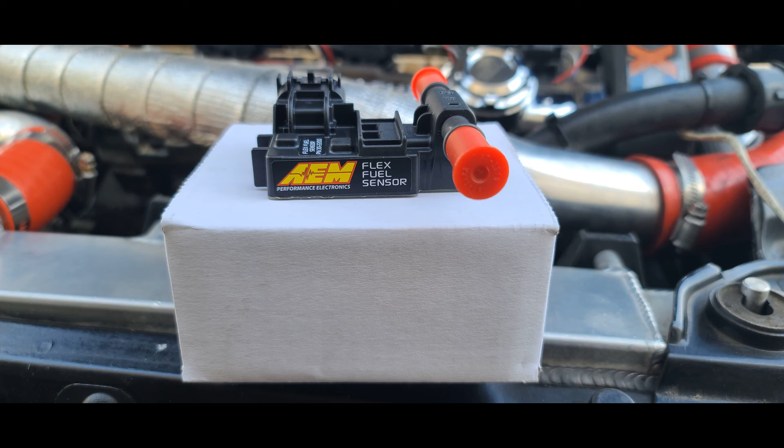Today we're going to be installing the AEM Flex Fuel Sensor on the Mitsubishi 3000GT VR4. Then we're going to go into the AEM Series 2 and make the necessary configurations in the ECU to run flex fuel in the car. We'll spend a little time talking about the pros and cons of E85, what other options are available to you, as well as considerations for if you need to do this, and if so, when. We've got a lot to do.

Let's get started. Installation is a fairly straightforward process. You're going to want to identify your return line for your fuel. That's going to be the one coming after your fuel pressure regulator, heading back toward the fuel tank and the pump.

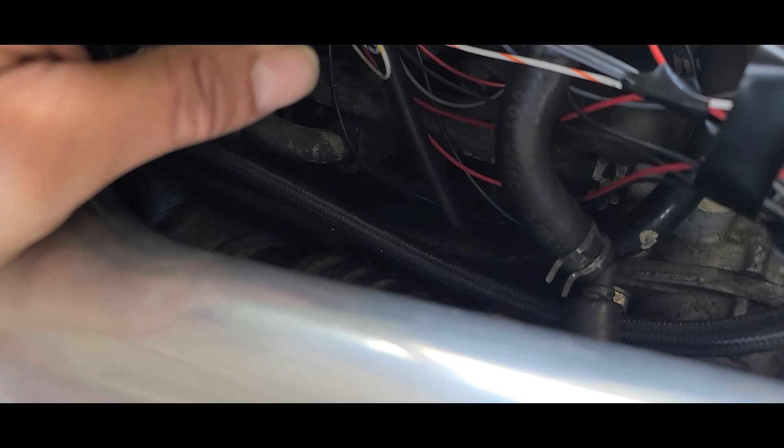Once you've identified that line, you're basically just going to cut it, relieving the fuel pressure first so nothing squirts on you. Then you're going to put the flex fuel sensor right in line with that line, so the flow comes into the sensor and out of the sensor back to your fuel pump. It doesn't matter which direction you put the sensor in, because it's going to pick it up either way.

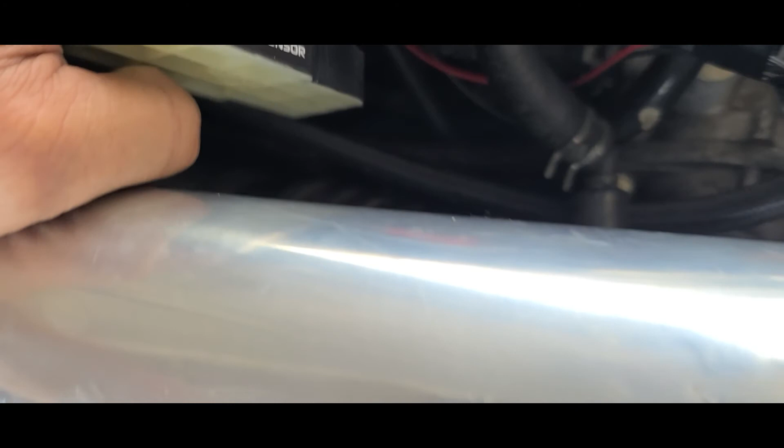Once that's done, all you really need to do from there is make three connections to the harness. One's going to be to ground, one is going to be to a 12-volt switched power, and the other one's going to go back to your ECU to provide the signal for AEM to pick up and determine what to do with your flex fuel amount.

Okay, so we start off by removing our return fuel line from our fuel pressure regulator. That'll give us access to the line and allow us to work with it.

Once you've loosened the clamp, you'll have to work it back and forth on each side, possibly with a screwdriver, so you can get it all the way off of there.

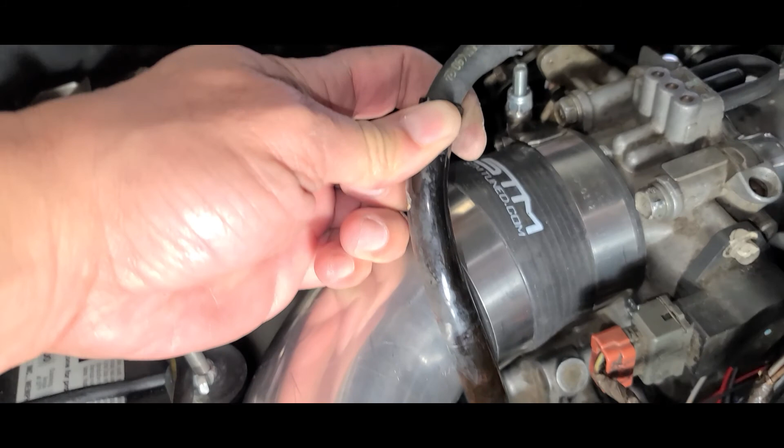After you've got your return fuel line removed, give yourself enough access. You can then cut a spot maybe about 6-7 inches down, which will allow you to insert the flex fuel sensor right there. Once your fuel line is cut, you begin the process of putting in your barb fittings, one into each end. Stick them all the way in there and secure them with a clamp.

Once you've got your barb fittings inserted into your return lines, tighten them up with a clamp to make sure they don't come off, and then we'll be ready to insert the flex fuel sensor.

Next, you insert the flex fuel sensor into your end fittings. Make sure that the fittings snap all the way until you hear a click. At this point, it's probably a good idea to go inside the car, start up the engine, and check for any leaks.

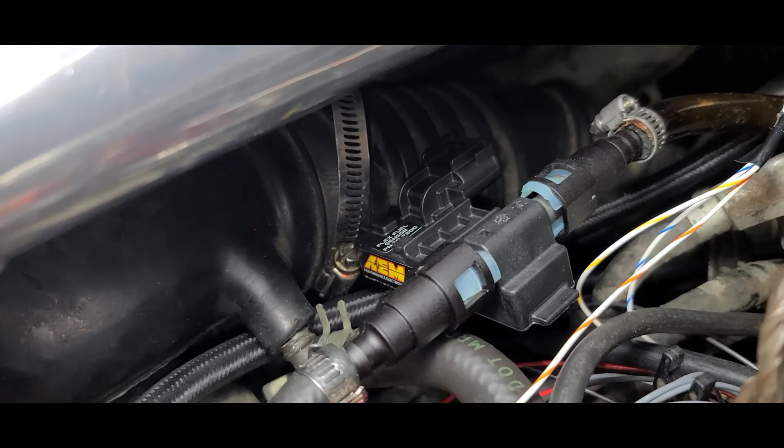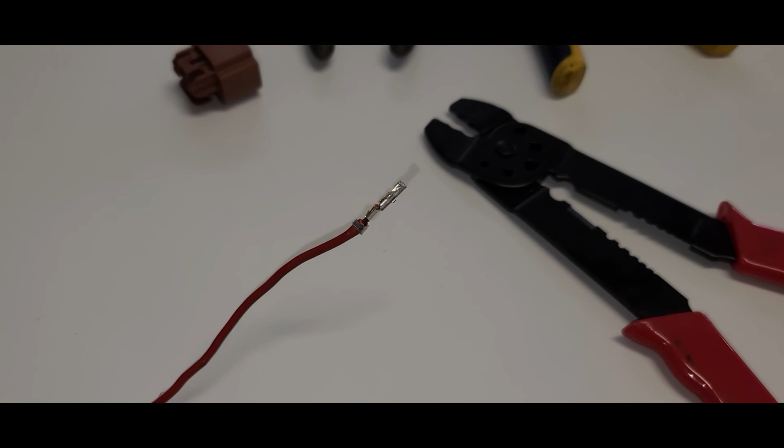Next, we want to carefully take our pins and our crimping tool and crimp our pins to our wires. Once that's done, we'll be able to insert the wires into the sensor harness, ensuring we push them all the way through until they click on the other side, ready to insert the harness into the sensor itself.

Okay, so inside the vehicle, down in the driver's side compartment area, if you're like me, every time I close this panel and put that Phillips head screw back in, I cross myself and say a little prayer before all those skeletons in the closet behind here, thinking this is the last time I'm ever going in here. But no, we're back in here again.

So we've got to get into the nest, and we're going to make some modifications in there. Really just got to hook in one wire into our ECU, so it should be pretty painless, and hopefully we don't mess anything else up while we're doing it.

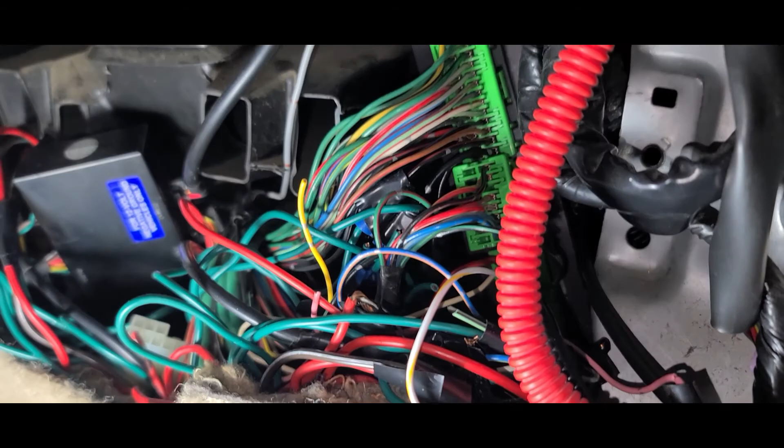Alright, so having opened up Pandora's box, we actually are not in too bad a shape. What we want to do is get to pin number 45 if you're in the second gen, and I think it's pin 115 if you're on a first gen. That's actually going to be on the second harness connection from the top there. Having already pulled it out a little bit, I notice it already has a wire into it — I think it's for magnetic clutch, which AEM doesn't use.

So basically we're going to cut this wire closer in to give us a little access, and then we'll be able to splice our signal wire from the sensor into there, plug everything back into the ECU, and we'll see what we got.

Now that our sensor has been installed and we've made the necessary changes down at the ECU to get everything pinned in and wired up correctly, we're ready to turn our attention to our AEM Series 2 software and begin making the necessary calibration changes to take advantage of our flex fuel sensor.

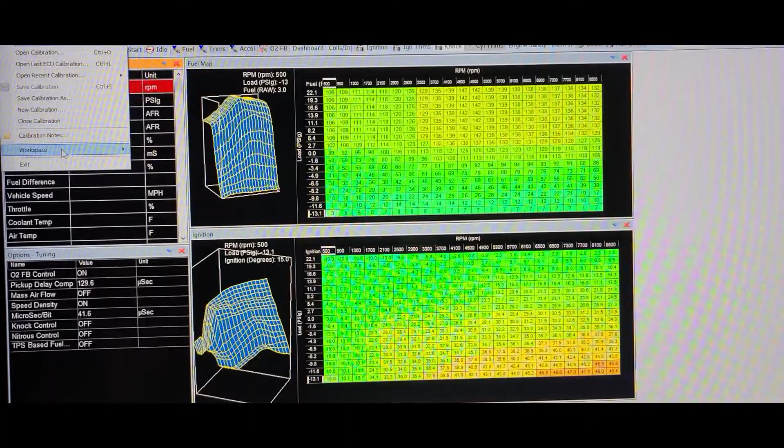The first thing you're going to want to do is open up the workspace for the flex fuel tuning. You'll find it listed here as Series 2 Flex Fuel Workspace.

You may want to make a copy. It's kind of my habit to make a copy so I can keep the original one around in case I make some changes, as I'm usually going to do. So we'll open up this one and we won't save anything, and we'll go ahead and open a calibration we can work with.

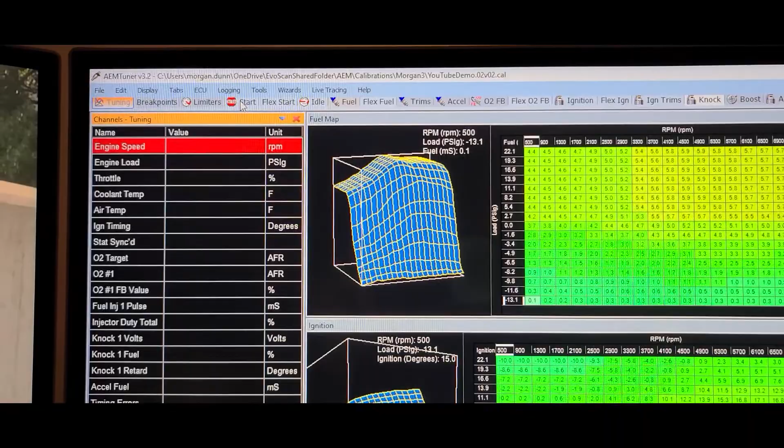The first thing you'll see that's different with the flex fuel workspace is that you get 5 new tabs, all associated with flex fuel. In addition to your start tab, you'll have a flex start tab. Your fuel tab will also have a flex fuel tab. The O2 feedback tab will have a flex O2 feedback tab to go with it. You've got an ignition tab and now a flex ignition tab to go alongside that. And finally, under your boost, you've got advanced boost, and to go along with that, a flex advanced boost tab. So those are the tabs we'll begin with.

So where do we start? We're definitely going to start on the flex fuel tab. Let's talk about what we see in here and what we need to work with.

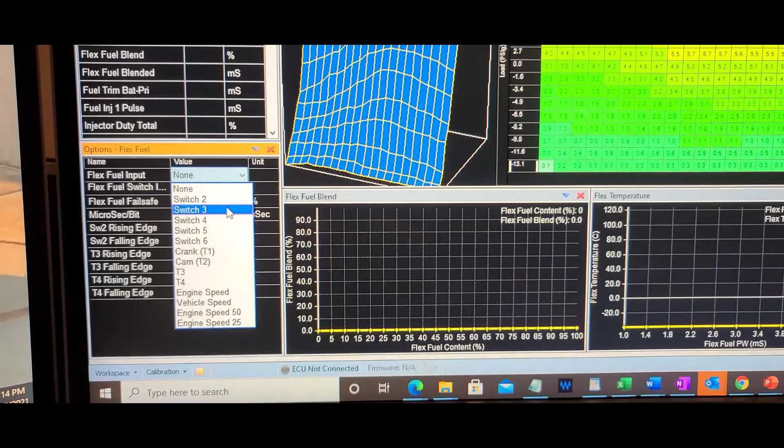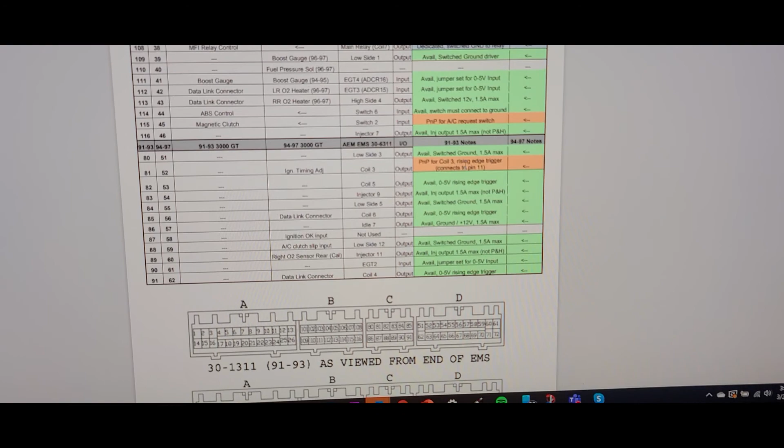On the left hand side, you get some additional channels that you wouldn't have had before, all noted with the word flex in front of them. So I have a flex O2 target, flex fuel frequency—these are the ones we're going to focus on right now—and flex fuel content. We'll talk about what those are and what that means, as it's part of what we're going to do to get things set up to use the flex fuel sensor.

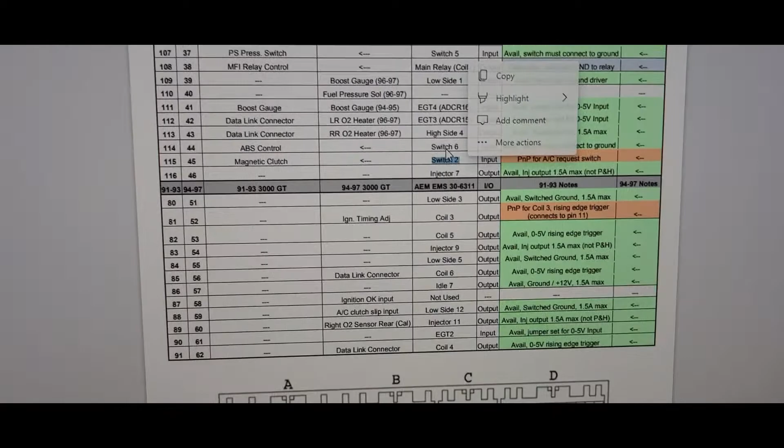Down here under options, you'll notice a couple things now that you have: a flex fuel input option, and another one called flex fuel switch input. Let's talk about the differences between these two right now.

The flex fuel input is the one you're most likely going to use, and you'll get a number of options here. Let's open this up. You get everything from switch 2 down through switch 6, T1, T2, T3, and T4, and then additional ones for vehicle speed and engine speed.

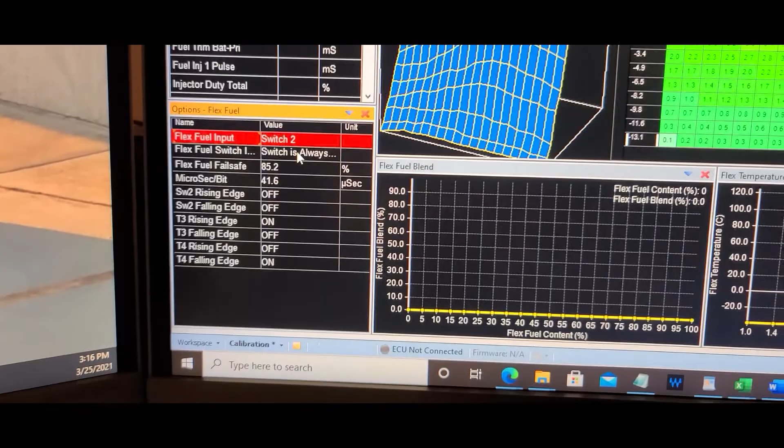All of these correspond to what you've chosen at the ECU to wire in the signal wire from your flex fuel sensor. So referring to our ECU pinout, in our example we wired things up to switch 2, which on the 94 through 97 second gens was pin 45, and on the first gens it's pin 115. So that's telling us we are on switch 2—that's our input that we're using.

You might have used something else—you could use switch 6 or one of the other options available to you that will show up here. So that's essentially how we're identifying which input we're going to be using to work with on the AEM Series 2 software.

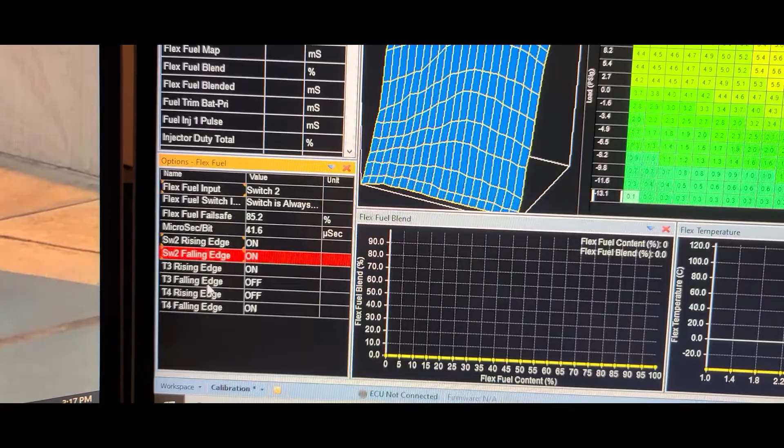Once you've identified which input option you're working with—as we said, we were working with switch 2—the next thing you need to do, and on my setup you have to hit enter after selecting this, is identify and turn on one or both of the rising edge and the falling edge for the switch, or whatever input you're using.

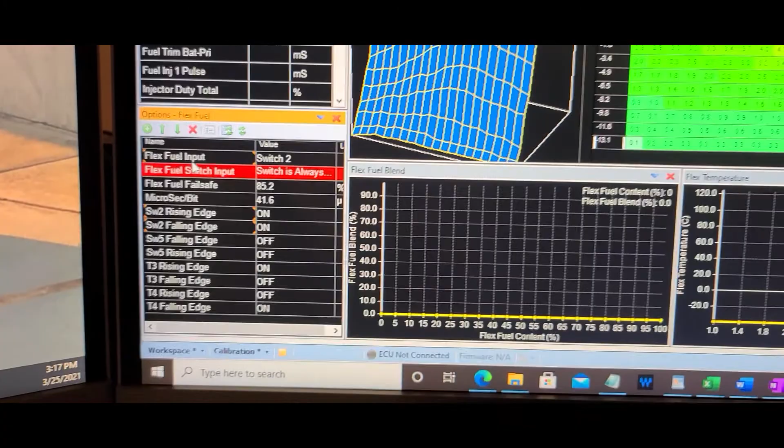So by default, if we're using switch 2, you'll notice there's already a switch 2 rising edge and switch 2 falling edge. Now, depending on the setup, various people have had different results with this.

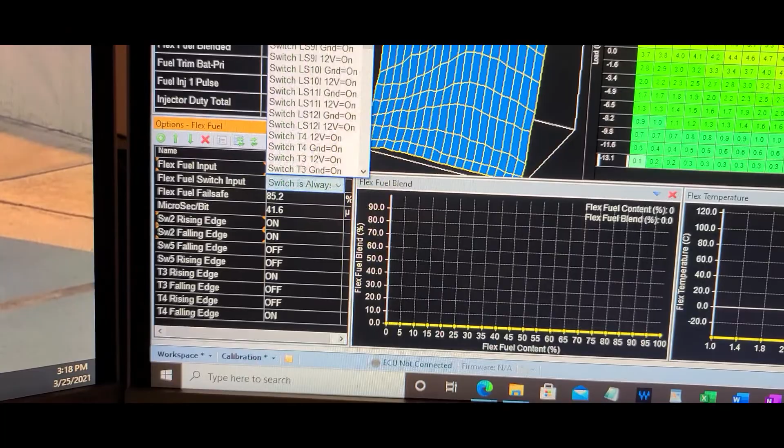If you speak with someone like Jeff Evans, he'll say you need to turn on both of these to get things to work right, and I'll explain what that means in a moment. Others, like maybe Faskings, will note that maybe you just need one or the other. You may need to play with these to get everything to work right, but these are the options you have here - you're going to need one or both of these edges on that correspond to your input. If your falling and rising edge isn't listed here, you just need to hit the plus sign and go find it.

So let's say we were working with switch 6 or switch 5, and one of the other ones isn't here. You can see they're listed there - switch 2, 3, 4, 5 - and just add them in. So let's say we got 5 rising and 5 falling. If that's what we were going to be working with, then we need those two, and we would have to turn them on if we were using switch number 5. What else do we need here?

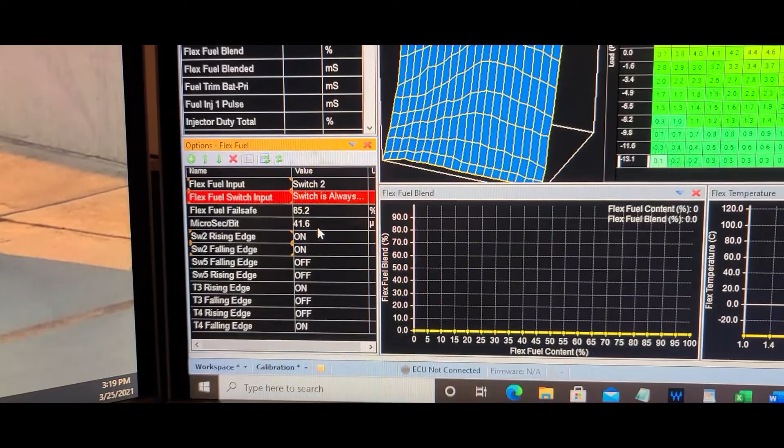Let's talk about this next option, the flex fuel switch input, and what the difference is between these two. If you use the first one, flex fuel input, it's basically saying I'm going to be using that flex fuel sensor you wired in, evaluating how much ethanol is in the fuel content, and then we're going to do some work between the maps based on that.

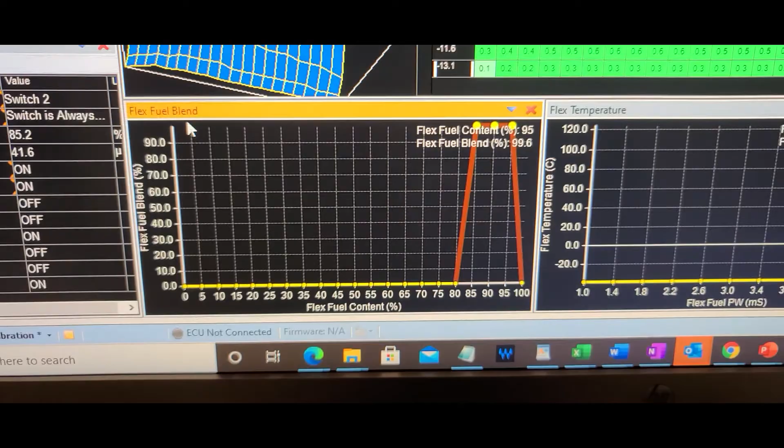If, however, you're not using a sensor, you can still use this area of AEM and just use this switch - when I turn this to always on, it's going to say that we're going to be using just the flex fuel maps. We're not going to use the standard maps, and we're not going to do any interpolation or averaging between them. We'll talk about that in a moment. But that's one way where, if you don't have a sensor, you're not going to be doing any interpolation between two - you're just running exclusively one of your two types of fuel.

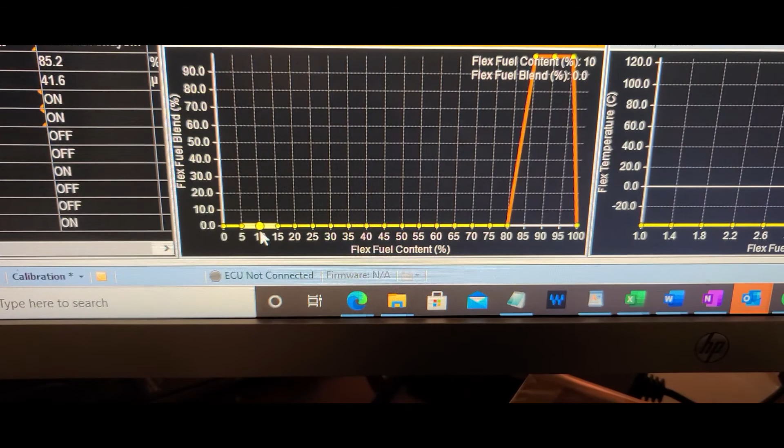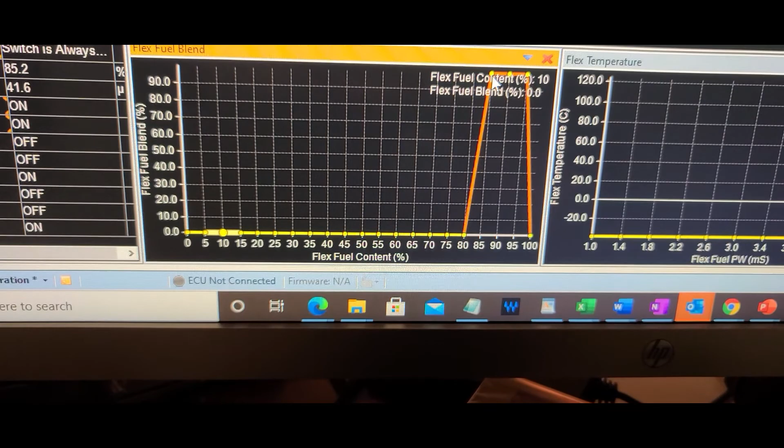So you're either going to be running your 10% ethanol or 0% ethanol, or your 85, 75, 98, whatever it may be. All you're saying is that AEM is just a way to switch between two maps if you've got those programmed and you just want to go with those two. So that's one option - we're going to turn it off since that's not what we're doing here. With the first one, it's going to use the sensor, and we'll do some averaging and interpolation between the maps we have for flex and non-flex settings based on that.

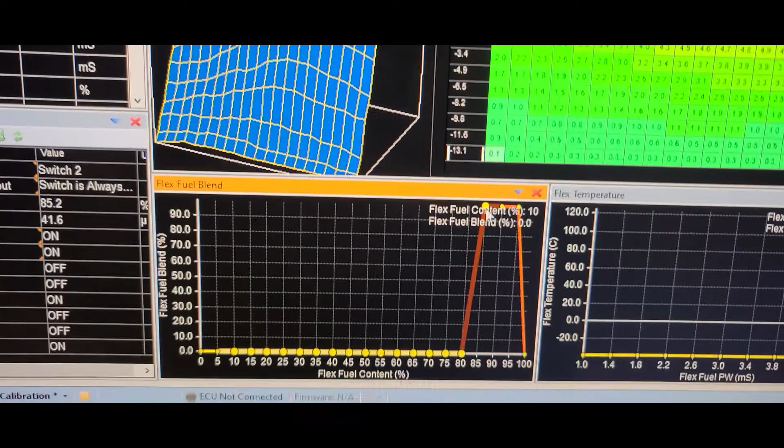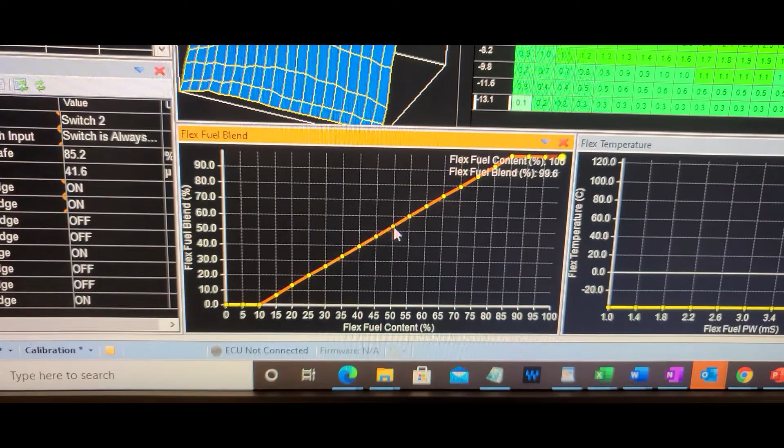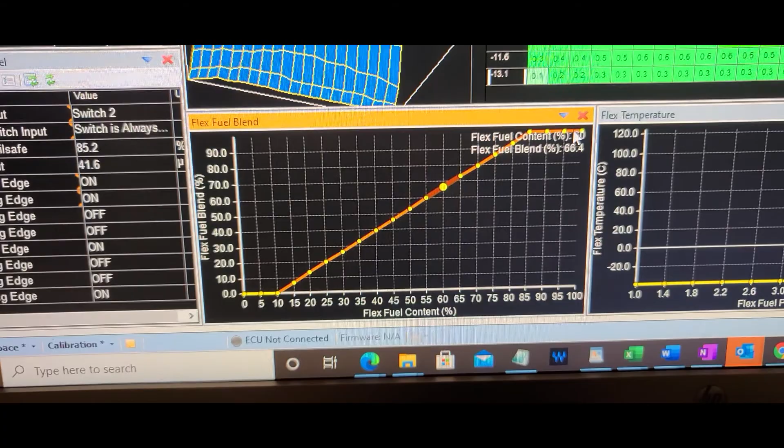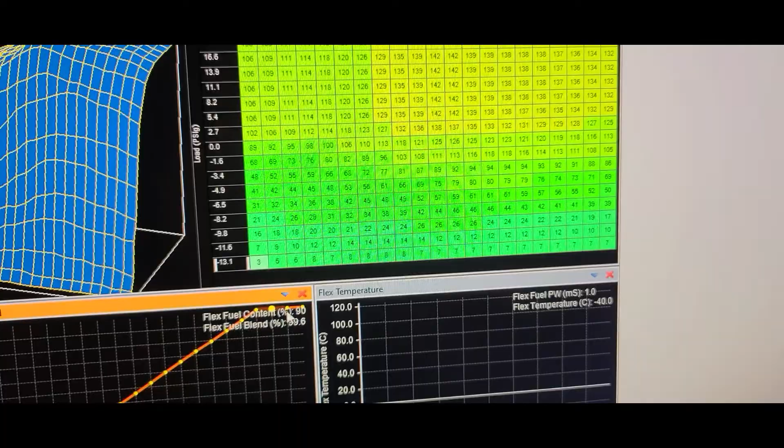So anywhere in between, we're now using the flex fuel areas and interpolating and averaging between the maps. You'll be able to look at that frequency - let's say if it's reading 60 hertz, then you know you're running E10, essentially pump 93 or pump octane ethanol levels. Correspondingly, what you're really going to be looking at more is the flex fuel content percentage. If you're running pump 93, it's going to read 10%. If you're running E85 and it's a summer blend, you should see something closer to 85%. If it's a winter blend, you might see 70 or 50, but this is the value we're really looking for here to work with.

Okay, continuing on, we're still on the flex fuel tab, and here's where we start to get into the nitty-gritty. You've got one table here, a 2D or 3D table called flex fuel blend. On the x-axis is the flex fuel content, and the y-axis is the flex fuel blend percentage.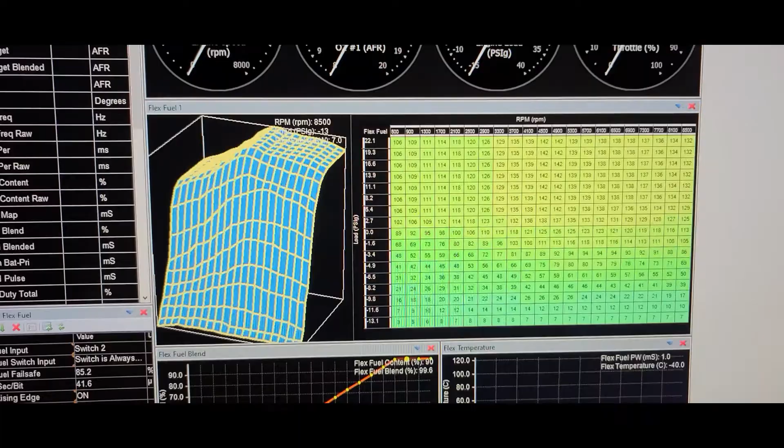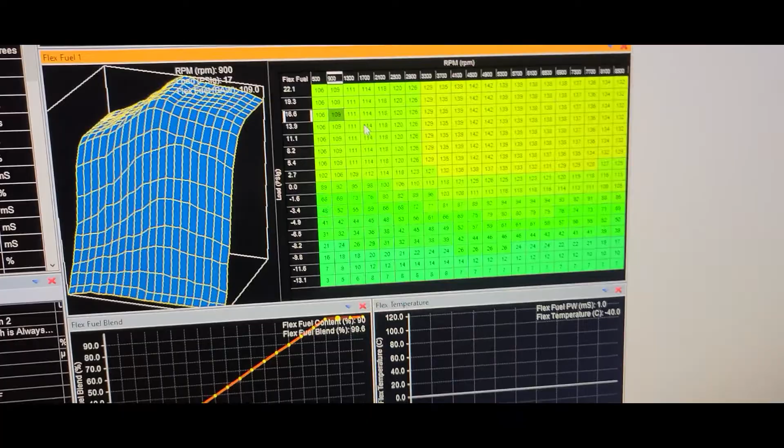Let's say the maximum you're going to run in your car is E85, evaluated at 85% ethanol. So what you can do is take everything from E85, from 85% on up, and just use your S button and set all of these to 100. That means when we're at 85% ethanol or higher, we'll be using 100% of our flex tables, all the calibration settings we have, whether for fuel, ignition, or O2.

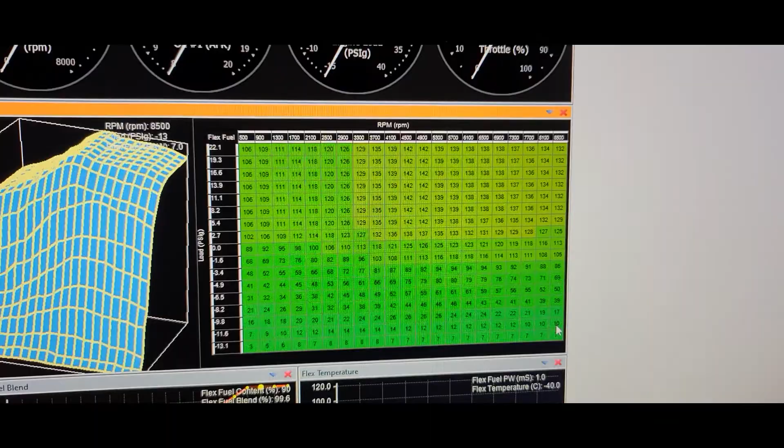Down at the low end, at the 10% range and below, we'll leave all that alone, because this is saying if we've got pump 93 E10, we don't want to use any of the flex fuel tables since we're not running anything related to flex fuel—it'll all be our original tables. The question is what happens when we've got some mix less than E85 but more than E10? This is where your flex fuel sensor gives you that percentage value, and you can use this now.

We're going to highlight all the values down to E10 and do a horizontal interpolation, like that. Oh, it looks like I left off something at the end here—let's make this up to 100. Let's just set the last one at 100 so our table is correct.

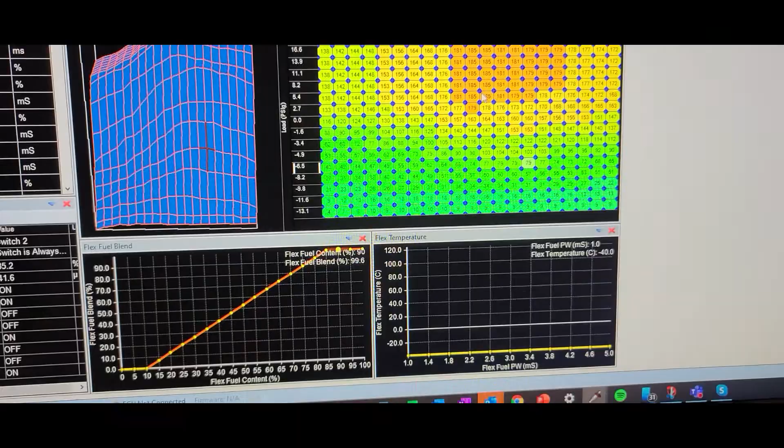So from E10 all the way up to E85, there will be a gradual increase as we move more toward the flex fuel tables and less from the original E10 tables. Anything below E10—E5 or no ethanol at all—we still won't be using the flex fuel tables, and we'll just stay like that. So this setting right here is the important part.

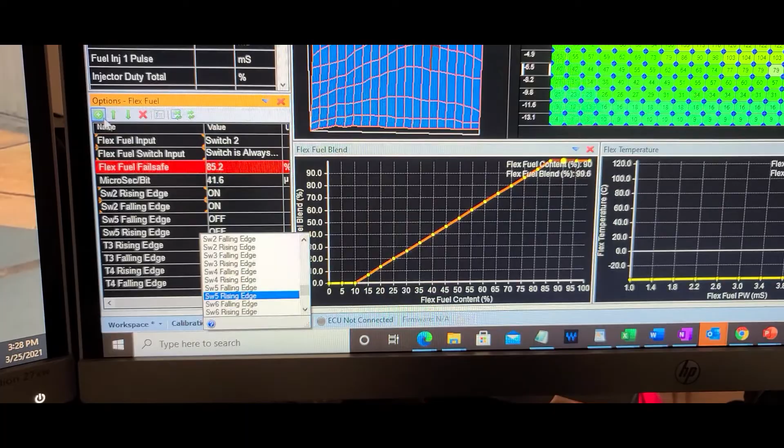And almost all the other flex tables are going to use this. Now, if you have E98 available to you, you want to go over here and start at E95 or 98, set all of those to 100, and then do your horizontal interpolation between 10 and your highest level of ethanol you're going to run.

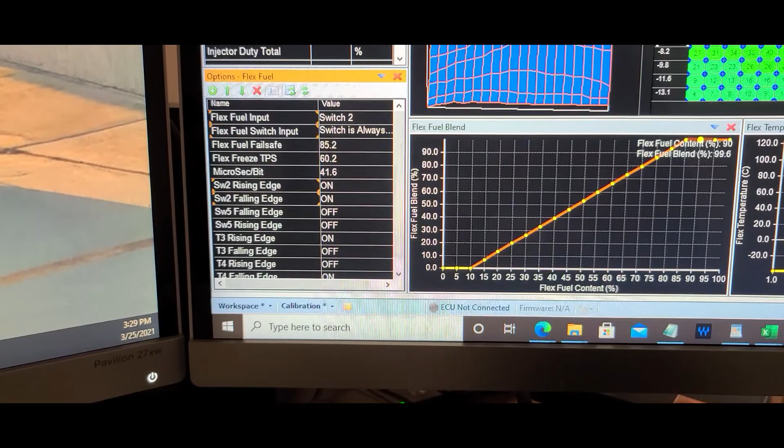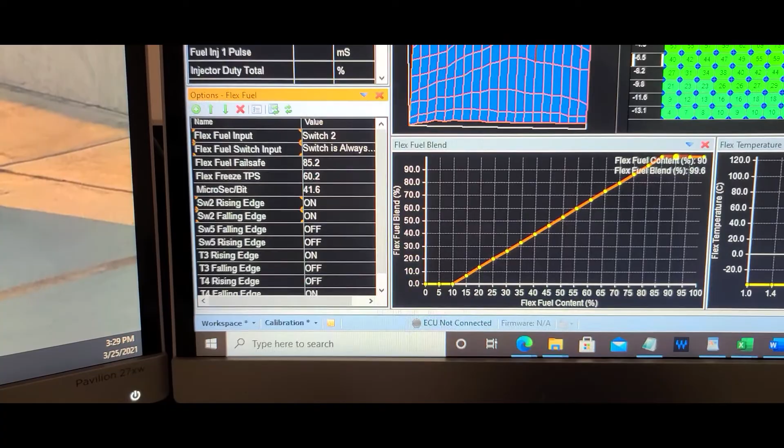Having set up our flex fuel blend, the next thing we'll do on this tab is make the changes to the actual fuel table for the flex fuel settings. This is your 85%, or whatever your maximum ethanol content is, and this is the fuel table you'll set up to manage that. For this video, we'll assume you've completed your tune under pump 93, so your fuel table is all set up, and now you're going to move to E85 and start using that.

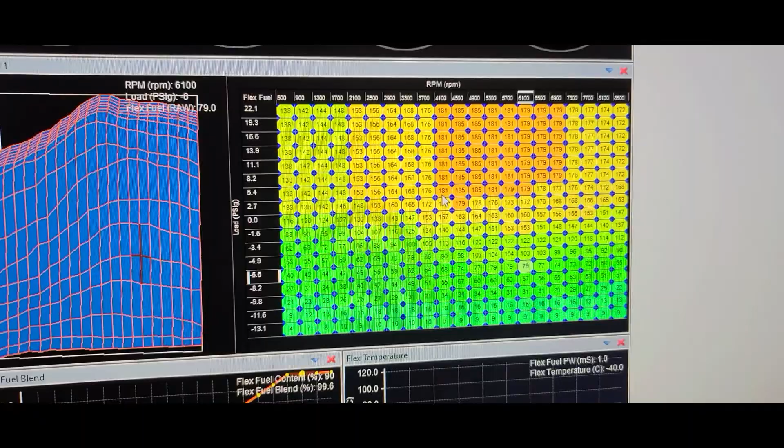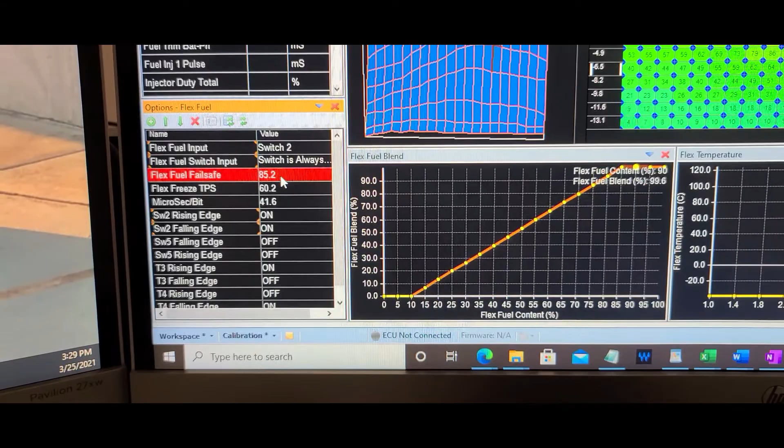So what you can do is take all of the values—let's do a Control A here—and copy all the values we've got in our original fuel map. Oops, that wasn't what I wanted, I just wanted to copy that. Take all the values there, go over to your Flex Fuel tab, and we can go ahead and Control A and Control V to paste all of them in there.

That basically makes your Flex Fuel table match your fuel table, but since you're running E85, you'll need to run at least 30%, maybe 35% or more fuel than you would on pump gas because of the requirements for E85. So once you've copied everything, make your percentage change—we'll do 30% for now—and just like that, our fuel map now matches our original fuel map in structure, but with the 30% more fuel we need to run E85.

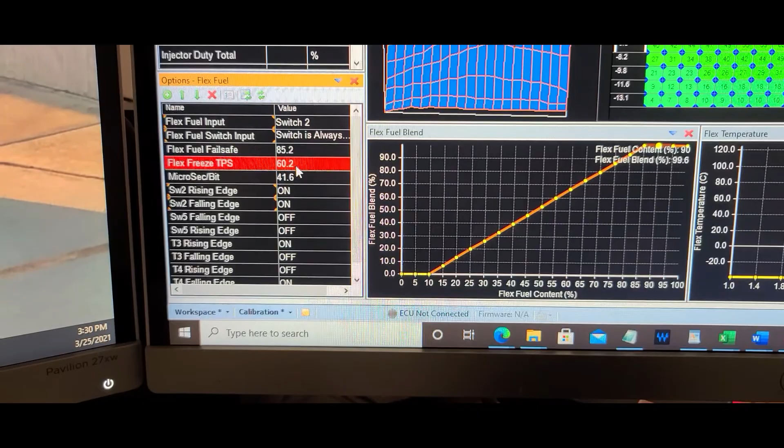This gets you most of the way there in terms of your fueling. This is not a copy paste and I'm done situation though. You're still going to need to go and do your runs. Do your same fuel tuning that you would do before. Do your idle tuning, do your cruise tuning, and then get into your wide open throttle tuning. All right, this is going to get you a good idea of where you should be.

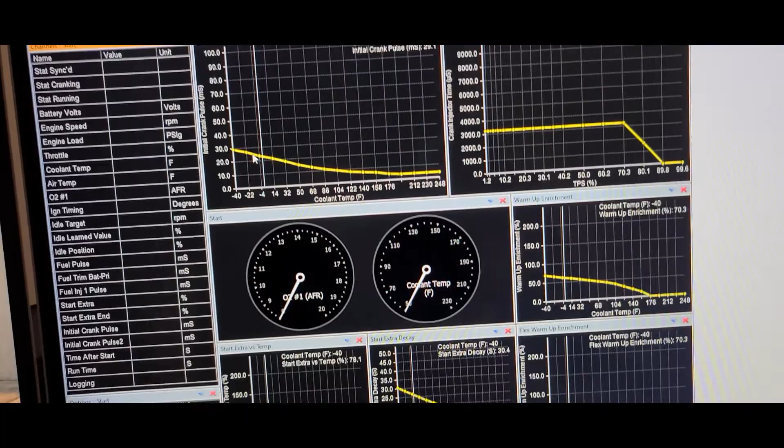The fuel map that you set up prior in your original tune should still be accurate, but you may need to add or remove a little bit of fuel to get to your O2 targets or to manage things in terms of where you want to be when you're in boost. So this is a starting point. Still got to do your tuning, but it's going to get you to a good space to start with.

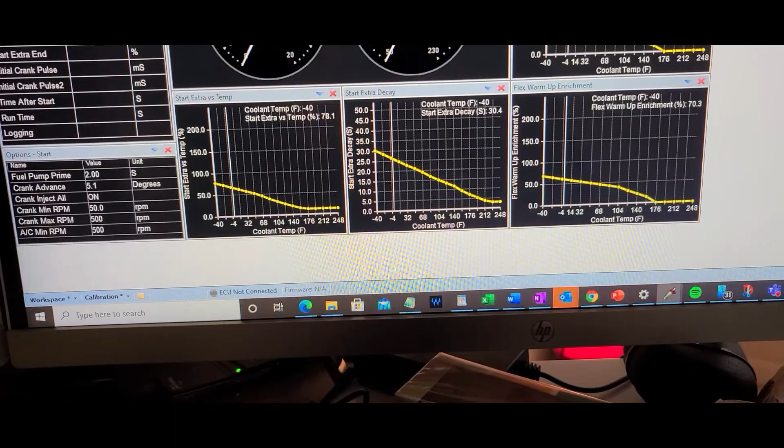Now the last thing we want to look at on the Flex Fuel tab is a couple more options, and these are for safety things. Two things that Jeff Evans emphasizes are your Flex Freeze TPS and your Flex Fuel failsafe. So we're going to talk about both of those. One is here, and you might have to add the other one. So let's go in and we see our Flex Fuel failsafe is here. We don't have the Flex Freeze TPS, so let's type FL to get us into Flex, and there it is, Flex Freeze TPS. So we can add this in here. All right, so these are two safety features. Let's talk about each one of them and how you might want to set them up.

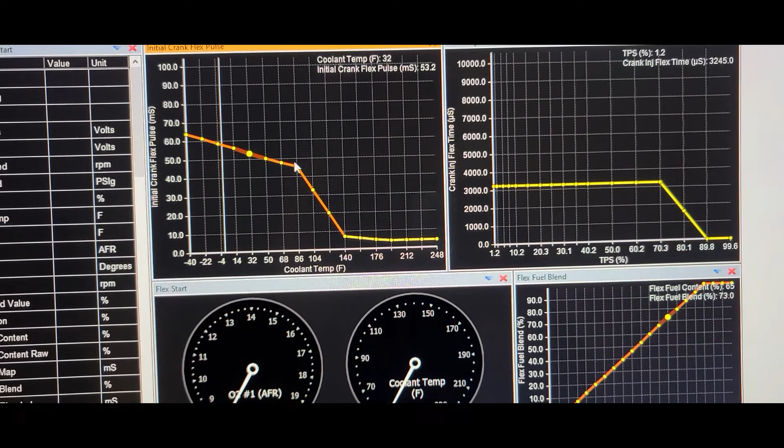Flex Fuel failsafe. For this one, if there's any time that you're running your car and for some reason you lose the signal from your flex fuel sensor, who knows what happened, some wire got detached or otherwise, to protect your engine you're saying, okay, what do I want to default to? What's the flex fuel range I want to run? Well, you have a couple of choices. If you're running your 85, which is basically saying I'm going to assume I'm running E85, which will be a richer fuel map, your worry is less. Let's say for some reason you're not running 85, but you can run rich and you'll be okay. The flip side is, you had this value too low, and you're not running E85, and your engine doesn't know what it's doing at this point. It's flipping between maps. This is just to protect your engine by running the richest map setting that you're going to have.

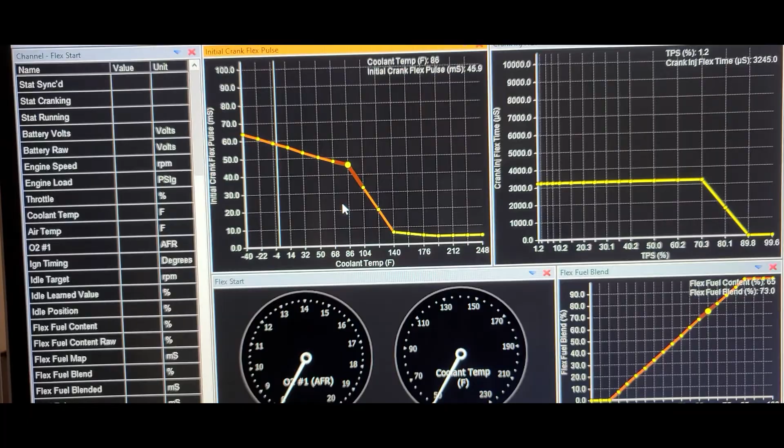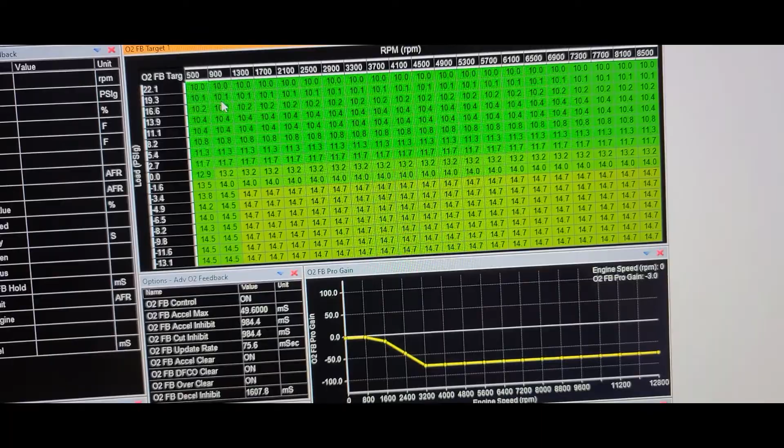The other one, this Flex Freeze TPS. So this is your throttle position sensor, and this has a lot to do with what's going on in your engine, especially in your fuel delivery system when you're on the go. Some of the things that can happen is maybe the amount of fuel that's going through your return line could be a little bit less or a little bit more, but probably a little bit less than normal when you're under full throttle. So there's a chance that the ethanol content value coming back from the sensor could be incorrect. So what we're saying here is once I've got my throttle above X percentage, 60% in this case, I'm going to freeze it right there. Don't change anything. Understand that I'm running at this rate. So if anything unforeseen happens, it's going to assume that I'm still running at this level.

So these are two of your safety features that are on the Flex Fuel tab, and you're going to want to use those.

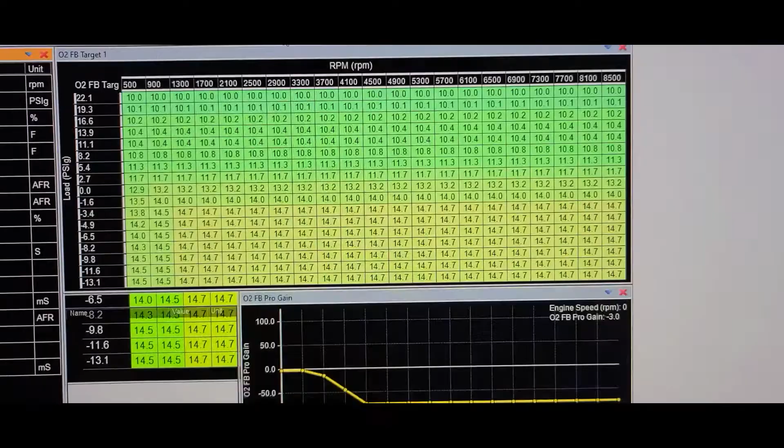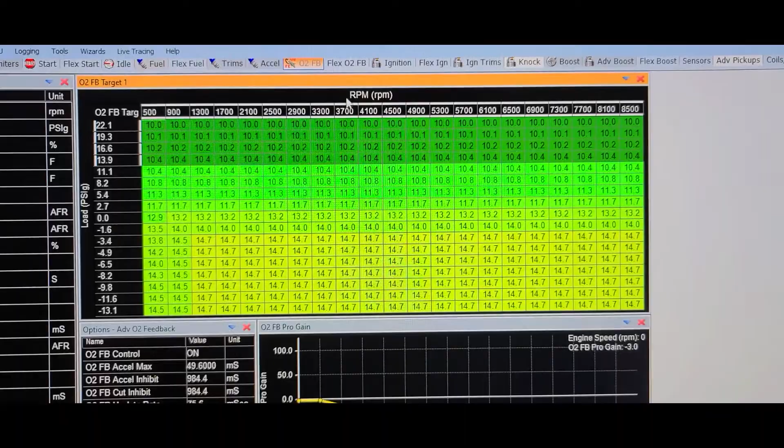Now, moving over to our Flex Fuel Start tab, what we're going to do is essentially take everything that's in your original Start tab and copy all those values over. So take your initial crank pulse, your crank injector time, warm up enrichment, warm up flex, start extra decay, and your start extra temp, start extra versus temp. Copy all those values over to your Flex Start tab. The additional table you'll see here is your Flex Fuel blend. Remember, we set this up previously on the Flex Fuel tab, and it's going to be showing up evident in all the other tabs.

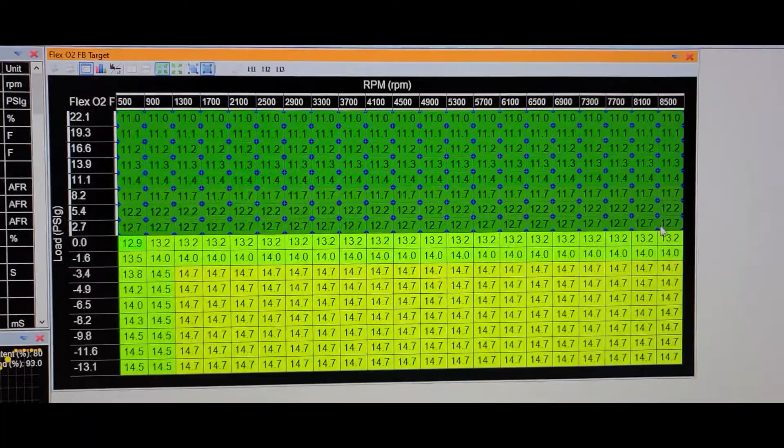It's going to be the same values as we set up there. This will be one exception, and that'll be in the Flex Ignition tab, and we'll get there momentarily.

There's really only one thing you're going to want to change here, and that's your initial crank flex pulse. Why we want to do this is because one of the natures of the physics of E85 is that it has a harder time starting up in the cold. If you're running E10 or whatever, you're going to be okay starting your engine cold. But you hear everybody complain from an E85 perspective that they have a hard time starting their car in the winter. There's a few things you can do about that, and AEM gives you opportunities to manage some things in your startup tables.

What we're going to want to do here is actually increase the initial crank flex pulse. So when we're in these cold temperatures, especially below freezing, this is Fahrenheit, 32 degrees Fahrenheit—I don't think anybody's going to start their car down here, but if you did, you're going to want to add a lot more fuel.

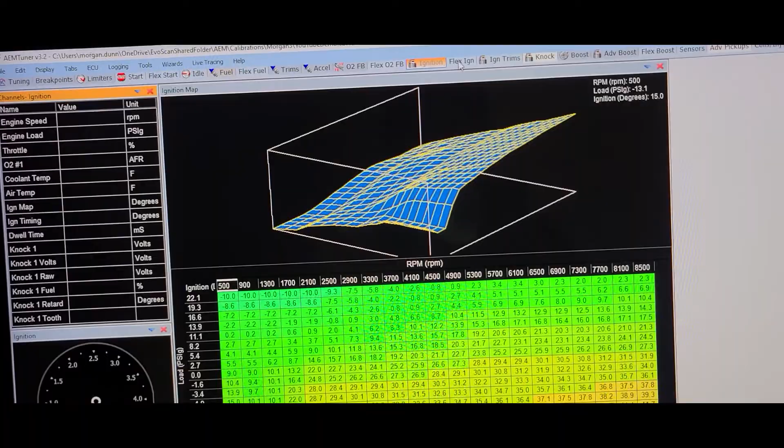So basically what's going to happen here, I'm going to do a copy paste from another table I have to show you how this should be characterized. It's going to kind of look like this. Your table may vary a little bit, but essentially we're saying, hey, in these colder temps, we're going to add more fuel during our initial crank pulse so we can get things going and get the engine running.

Once we've warmed up, by the time we get to 140 degrees, the engine's definitely warm at that point, and we'll be at the exact same level of fuel that we're putting through in the flex pulse as we were doing in our normal pulse, 140 and above. So if the temperature's good, we're going to be doing the same thing. If the temperature's cold, we're going to add more fuel. But that is really essentially the main change you're going to make in your flex start table.

Depending on where you live, what temperatures you experience, you may not need to do anything here at all. But it won't hurt you either. This startup section is going to be very brief.

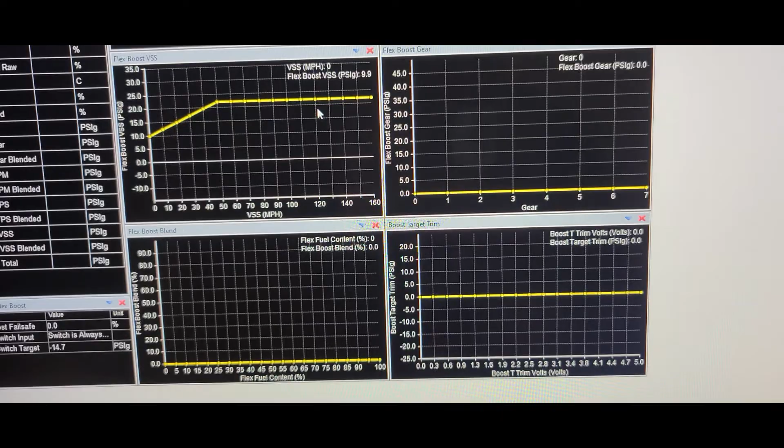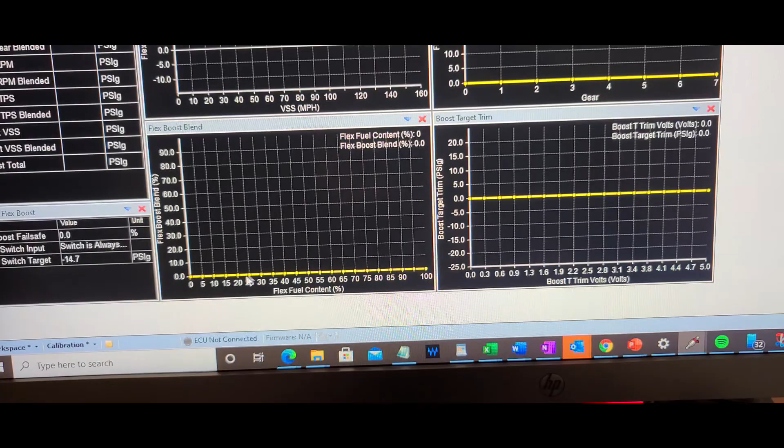And what I would do, regardless of whatever AEM may start you off with, is copy paste all of these values from here and bring them over to your Flex O2 table. Do a Control A and paste them all in there. These values were the same.

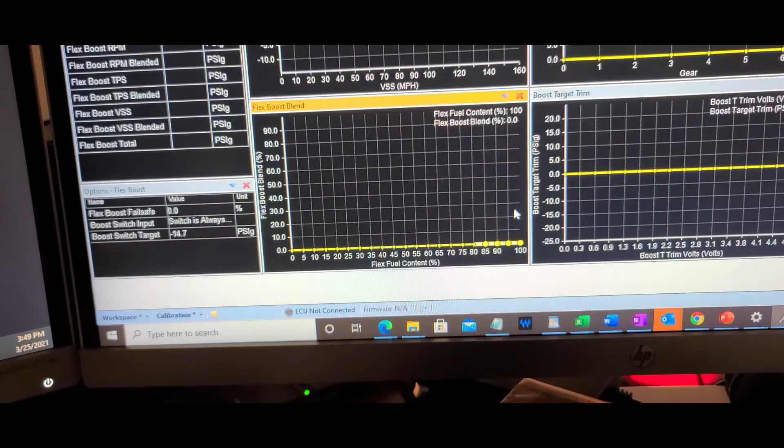You're going to notice again that Flex Boost Blend table is here. Again, it's going to just come over from our Flex Fuel table, and will remain the same in this table as well as the startup table.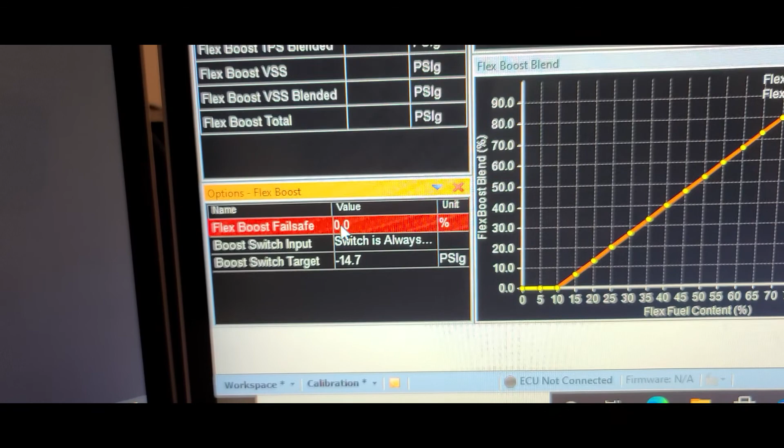Then let's just do a little horizontal interpolation between that first row in the boost area and the first row below the zero level. So we'll just do a little H here. That'll blend that thing in nicely for you. So your map has consistency, a gradual increase, and now you're running into the low 11s as part of your flex fuel map.

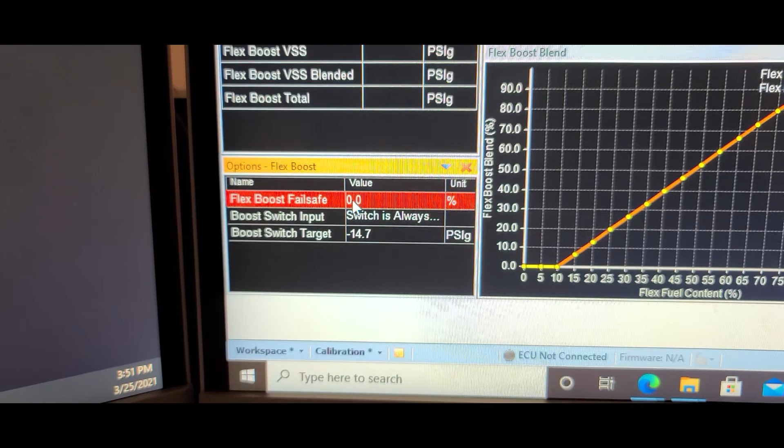This is what I do in terms of changing between a Pump 93 map, a Pump 91 map, and a race fuel level map. This is the one change you make that I recommend if you're going to do it from Flex O2.

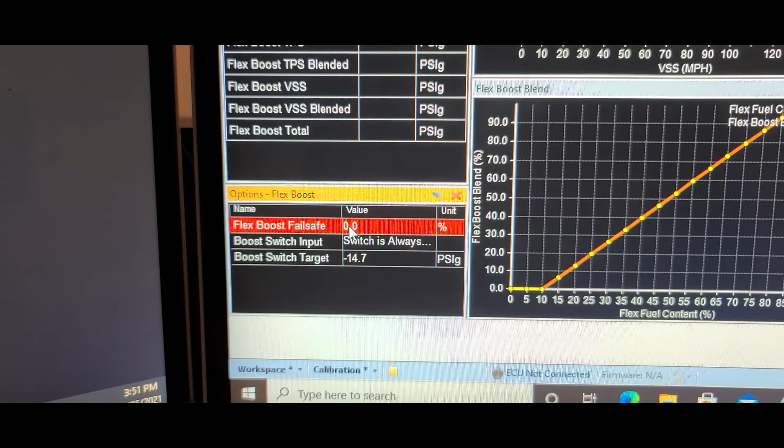And again, we talked about earlier on the fuel tab, same thing here. You're going to still do your fuel tuning to make sure that these values are appropriate, and just go through the process.

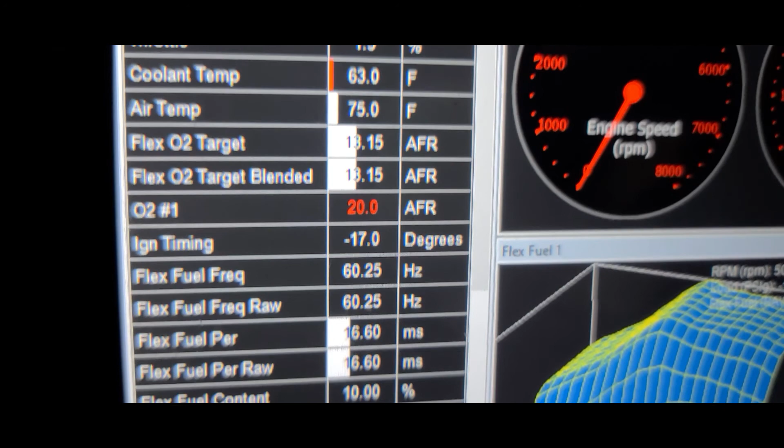Now, moving on, we'll go over to our Flex Ignition tab. We've got a timing tab and a Flex timing tab. Similar to what we did in the fuel areas, we're going to take all the values we originally had in our calibration for pump gas or E10, copy them, and bring them over to our Flex tab. Control A and Control V will paste them all in there.

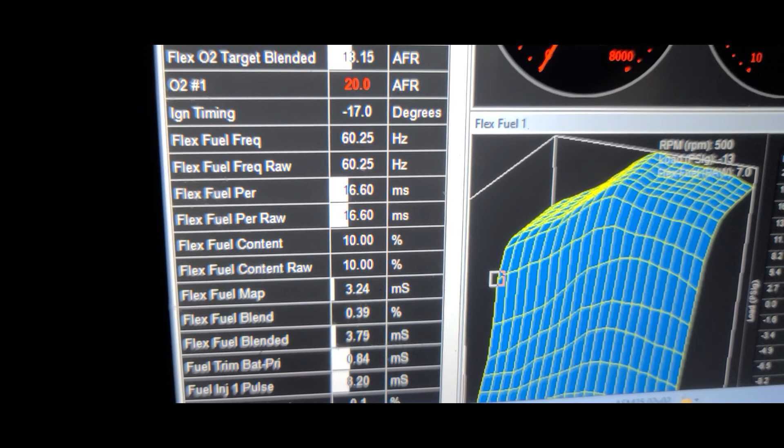Now these values are already copied in. So what you're able to do is a couple things with this. If you're running a higher octane level of fuel, like a race fuel, you have an ability right away to safely add at least 3, maybe 5, maybe 7 degrees of timing almost across the board. Your minimum, your MBT, is going to be quite a bit higher than it was before under pump gas, where we were definitely knock limited pretty quickly.

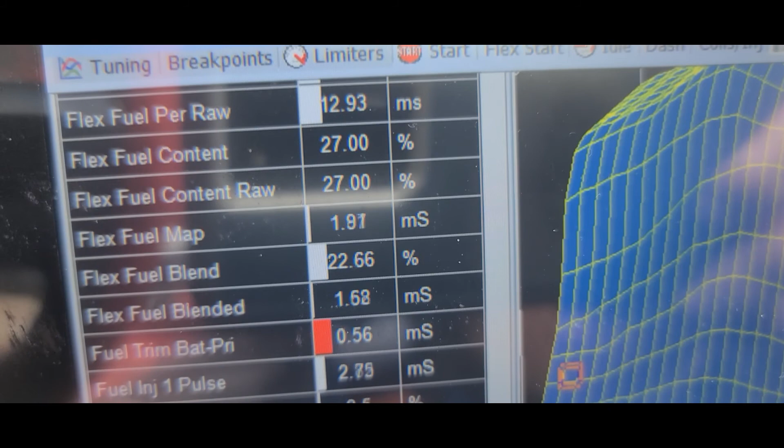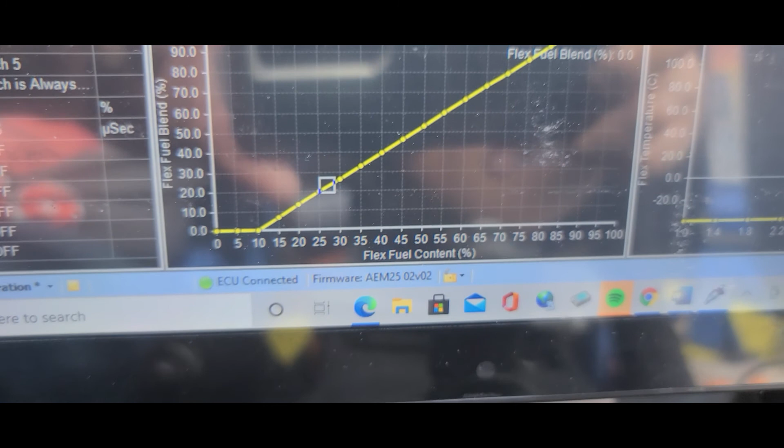So you can go in here, highlight all of the cells, and let's hit A to add. For safety's sake, I'm going to add 5 degrees right now. That's going to up the table, and it's going to stay in the same calibration shape that you created. You haven't changed anything here except that you've increased your timing by about 5 degrees.

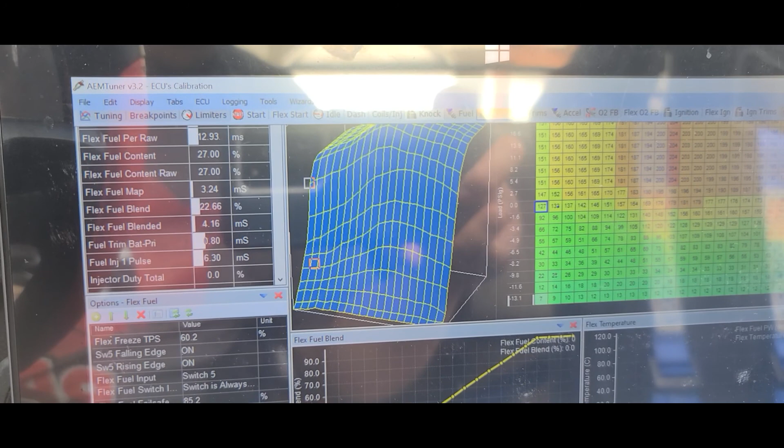As I said before with fuel, it's going to be the same thing with timing. You're still going to want to make your runs, check against your knock, see how things are going. You're going to check your torque and keep working to increase until you reach that maximum brake torque, both from a boosted perspective as well. Get yourself some steady state tuning and do this area of your map as well to round out all of your tuning. This is going to get you halfway there, maybe much more than halfway, because you've already done the hard work in your 93 tune to get the shape of your ignition table.

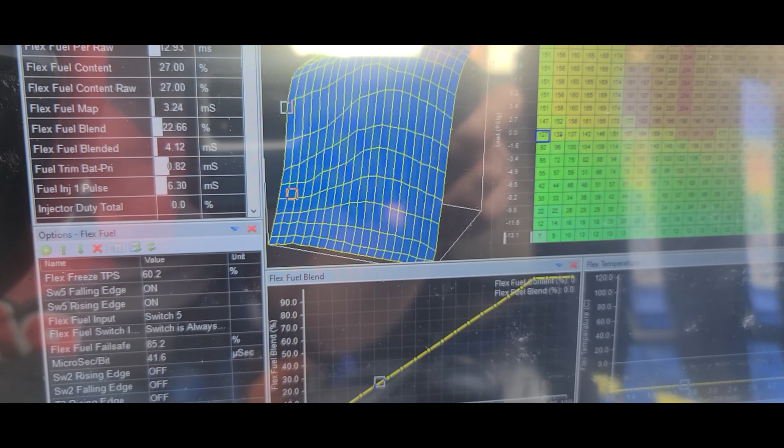So you can use that to your advantage and finish the job up with a good starting point. Now I want to refer to the left-hand corner. We've got a Flex Blend ignition table again. This time you'll notice it's not been set - it did not take the defaults from what we did in our flex fuel. You may choose to do the same thing as before, which is I'll take it from 85 all the way to the end and set that at 100, then grab all the values from there down to 10 and horizontally interpolate again.

This would be the same setup as before, but you have an option here, right? You may want to do something a little different. What this table is doing is saying: when I'm running E10 or below, don't use anything from the flex tables. If I'm running 85 or higher, use 100% of what I've got in the flex tables, and anywhere in between, interpolate those values and give me what that should be. So you may choose to do something different with your timing - you may say from 75 on up, or from 65 on up, I'm going to run 100% of my flex tables for timing only. So this just lets you know you have some options here. That is how we set up the flex fuel tab for ignition.

Now down to the last flex tab we have to work with, and this is your advanced boost and your flex advanced boost tab. In your advanced boost, if you're running the solenoid and you've set up all your boost targets and everything, I would take all of these values from these 5 tables and copy them over to your flex boost table - essentially you're probably not going to change anything there. Again, this is going to be up to you, specifically how you work with your boost solenoid that you've got in your car and what you want to set up.

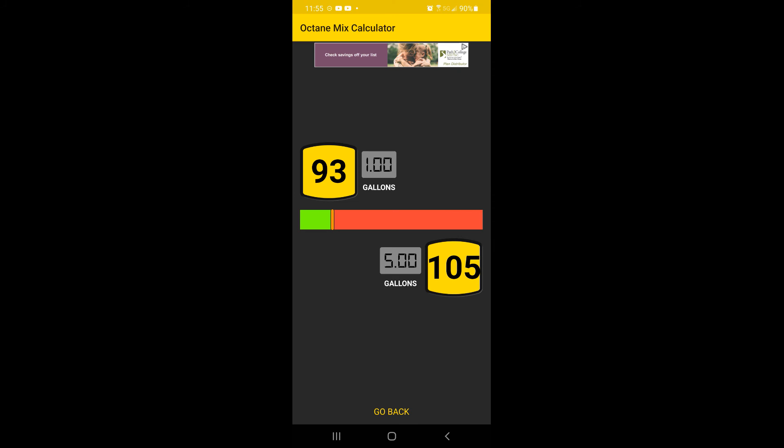Once again, you've inherited a flex boost setting—actually, you have not inherited your flex boost settings from either the fuel or ignition tab, so this one you have to set up again on your own. If there aren't any changes you want to make between your flex boost table and your advanced boost table, and they're all exactly the same, you don't have to do anything here. It's not going to matter.

But if you're going to make changes between the two and want the averaging, go through that same process: take it from whatever your highest level of ethanol you expect to use, set that at 100, and do the horizontal interpolation from your highest level value all the way down to your lowest expected value. Once again, you have the opportunity to do something different here if you'd like, and this comes down to personal preference and what you prefer within your boost table. That's how we set up those 5 flex fuel tables within AEM, so we'll be able to use our flex fuel sensor to our advantage and be ready to go.

Next we're going to step inside the car and see how things look when we fire things up.

On second thought, as I've been going through this rather quickly, I'm obviously not going through every option set on all of these tabs. I'll leave that to you to do the research and set things up specifically for your car. But one of the things we want to continue to look at is that whenever you have a fail-safe option, you do want to set it.

On the Flex Boost tab, there's a Flex Boost fail-safe, and essentially this is saying, if for some reason we lose the signal, what is the safest situation to run in our car, not knowing where we're at. This essentially wants to run the lowest amount of boost possible, so that if things go a little haywire and your car doesn't know what kind of ethanol is in it, you can put things immediately at a safe level. That's one of the great things about AEM—lots of opportunities to protect your engine from various scenarios, and it's great they've included those things for flex fuel tuning.